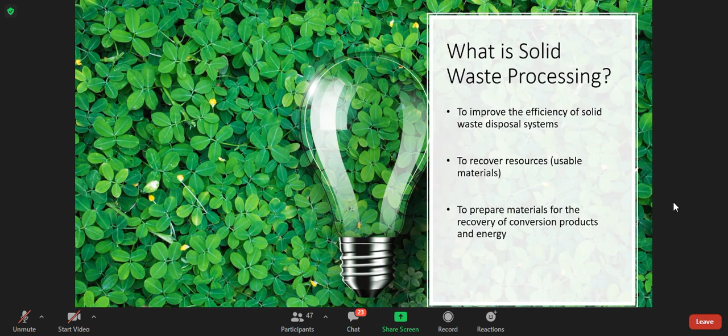Okay? Right. So what kind of techniques do we have to process? The first one, we have mechanical size and shape alterations.

The function is to change the size and shape of the solid waste components, so it will reduce the size of the solid waste.

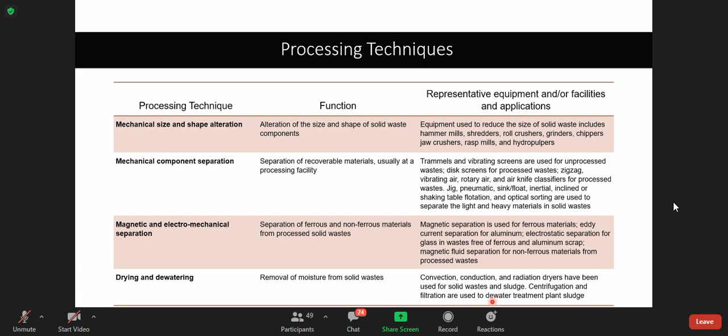So these are the methods and equipment for processing and recovery. So similar things, and then this one is more general.

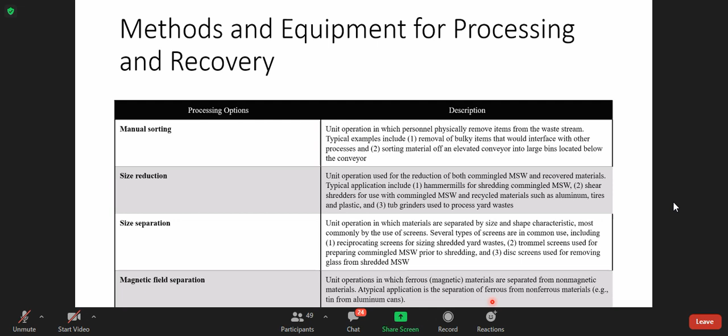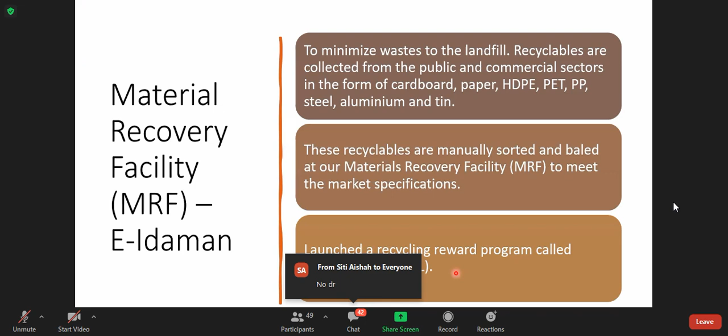The advantage of the material recovery facility is that in 2017, they succeeded in recycling 4,000 tons of recycled waste. And then 20% of organic waste is being recycled, so they can generate, in 2017, 1,000 plus compost.

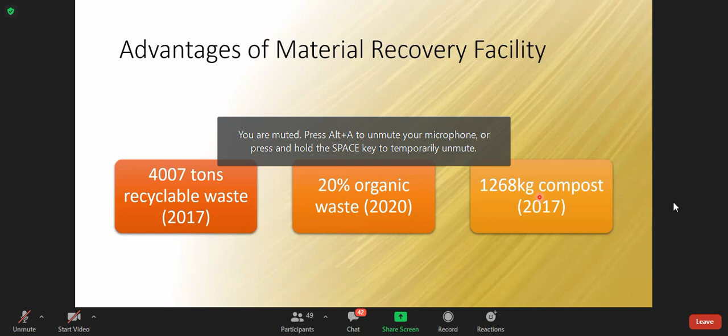Okay, so next we look into recycling. Recycling or salvage is a form of resource recovery and is the reprocessing of waste to recover the original raw materials. For example, when you recycle plastic, it means that we don't need to go retrieve petroleum.

Plastic actually comes from petroleum, so you don't need to go for the petroleum. We can just reprocess the byproduct plastic to make new plastic materials.

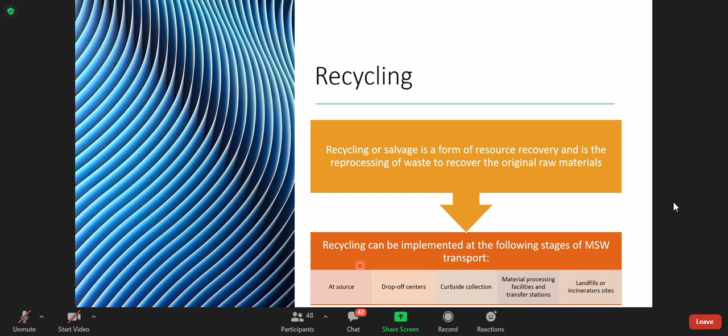And then finally is the landfill and incinerator site.

So what are the benefits from recycling? First is conservation of non-renewable resources such as metal and petroleum. The use of recycled materials such as aluminium, ferrous metal, and plastic reduces the extraction of non-renewable resources.

Energy conservation: the use of recycled aluminium beverage cans for manufacturing aluminium products uses 5% of the energy as compared to utilizing bauxite ore. Reusing a glass and plastic container 10 times will consume less than 30% of the energy of a single-use container.

Thirdly is environmental protection. Recycling of our municipal solid waste results in less pollutant emission into the air, water, and land as compared to extracting virgin materials.

We also reduce the volume of solid waste disposed by the landfill or incinerators. Land conservation: the land requirements for landfill will be reduced if a greater volume can be recycled.

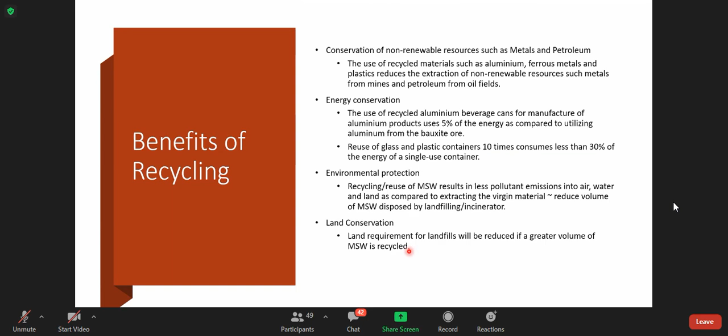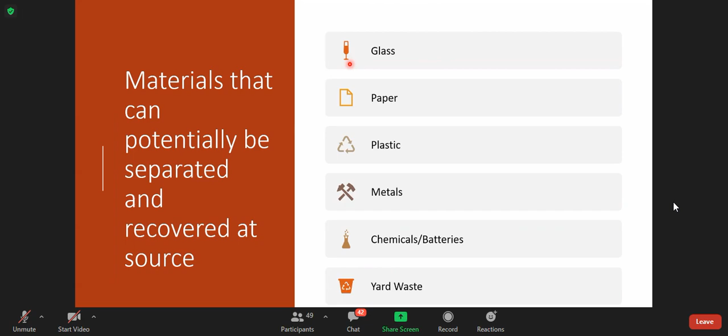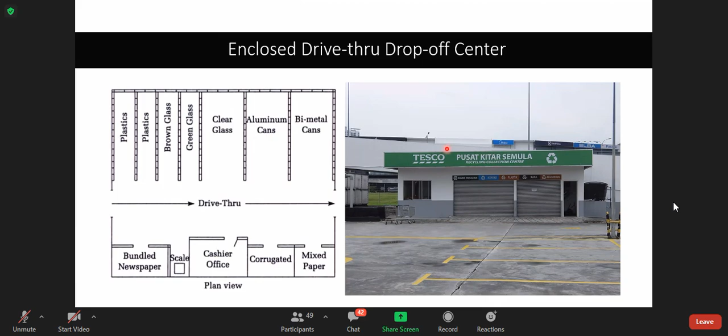So this is the drop-off centers for drive-through. After this, you can try to look into Tesco and similar places where you can actually just drive through to drop off.

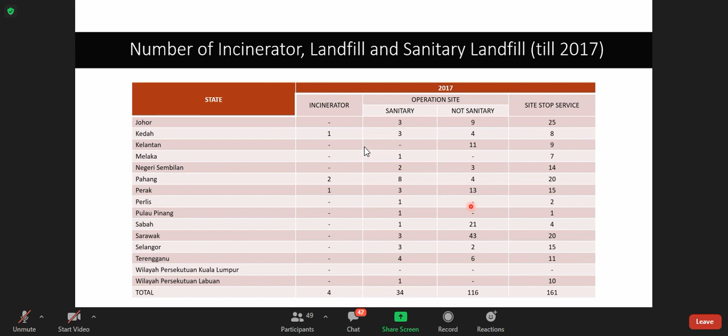In the next class, you will learn in detail what is the difference between sanitary and not sanitary landfills.

Okay, so resource recovery for energies. Selain daripada recycles, we can actually try to get the energies from our solid waste. Bila kita buat pembakaran, so dia akan ada steam. Bila ada steam, so bolehlah kita ambil steam tu, haba tersebut dijanakan sebagai electricity kita ataupun methane gas or anything.

So the solid waste has a value as a fuel with the separation and removal of the non-combustible portion of the solid waste through shredding, screening and air classifying. Most modern combustion devices are designed to recover the energies.

So the first refuse to electricity system was built in Hamburg, Germany and New York City, US. Solid waste are burned in specially designed incinerator furnaces, jacketed with water-filled tubes to recover the heat as steam.

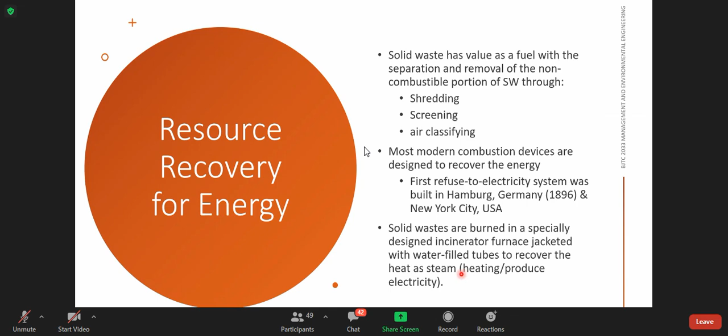Okay, so this is the explanation for the system. Refuse-derived fuel: the combustible portion of the solid waste that has been separated from the non-combustible portions. So the heating value will be up to 10 to 16 megajoules per kilogram.

And then solid waste can also be incinerated in waste-to-energy plants to produce steam for direct use. So we should suggest that these waste-to-energy plants be built in highly urbanized areas such as Klang Valley, Johor, Penang.

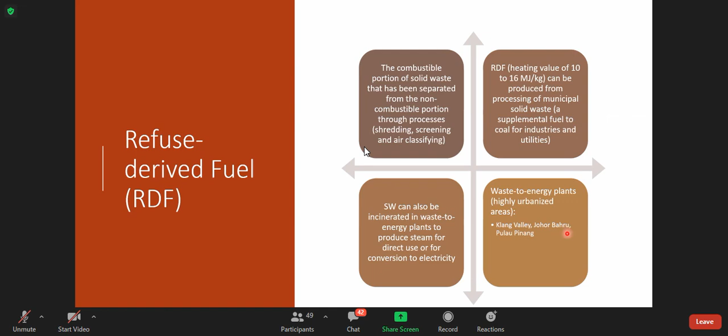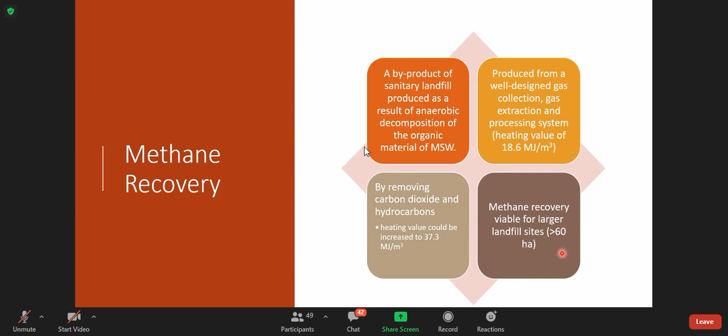Okay, so methane recovery. This is actually getting methane from the landfill. It's a byproduct of sanitary landfill produced as a result of anaerobic decomposition of organic material. It's produced from a well-designed gas collection, gas extraction and processing system by removing the carbon dioxide and hydrocarbons. So methane recovery will be suitable for a large landfill site.

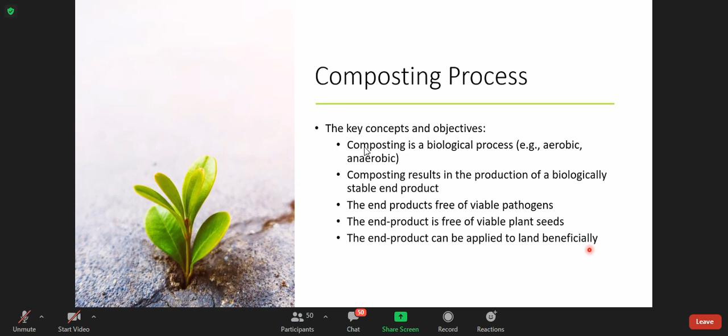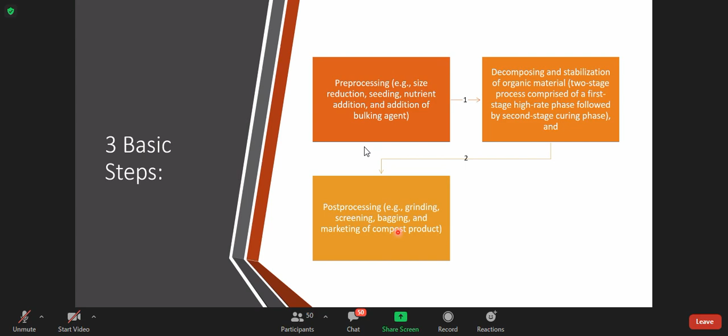Okay, so what is the use and functions of the compost? Compost improves soil moisture retention, it's a good soil conditioner but a poor fertilizer.

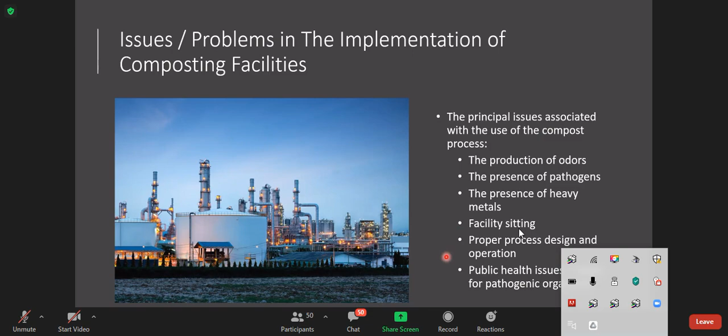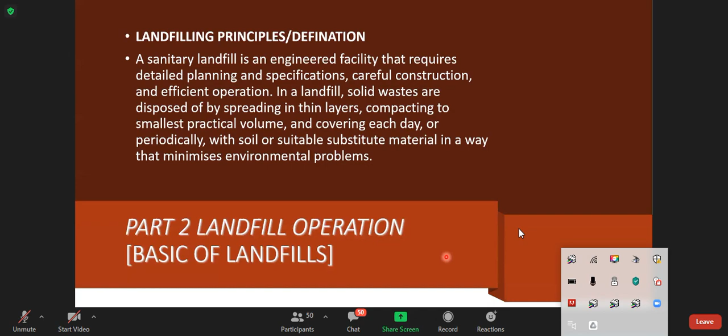Okay, all right, so I will stop here. Yang ni saya akan mengajar on your Wednesday class on the landfill. I will teach landfill on the next class.

Okay, so do you have any questions? Sanitary pad can reprocess?

Is actually depending, but then usually no. There are actually two types. Usually, when you are at home, the sanitary pad is disposed as a normal solid waste because we will just bring it into the dustbin as usual, right? But then if you go to office, or even some hospital or some hotels, you will see they have a sanitary bag, right? That one they will manage it as a different category - as a clinical waste. So this thing they will send for incineration, so it will be burned up. It will be sent to the incinerator and then the incinerator will burn it, then it will be produced as ash.